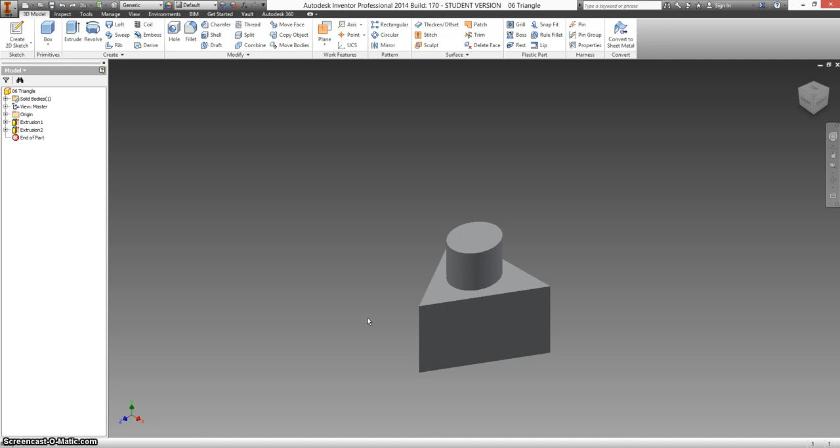Now that you know how to loft, we're going to go back to our triangle base, and we're going to make the female passenger for the Automoblocks car. This is a good example of lofting because with the waistline and the different curves that she has, it's going to require more than just simple extrusions.

First thing is we're going to take this chunk that was an extrusion and delete it. But we're going to keep the sketches that we first used to make it. So uncheck consume sketches. We're going to make a new plane, and according to my drawing I'm going to drag it up 0.19 above the surface. Make a new sketch on that plane.

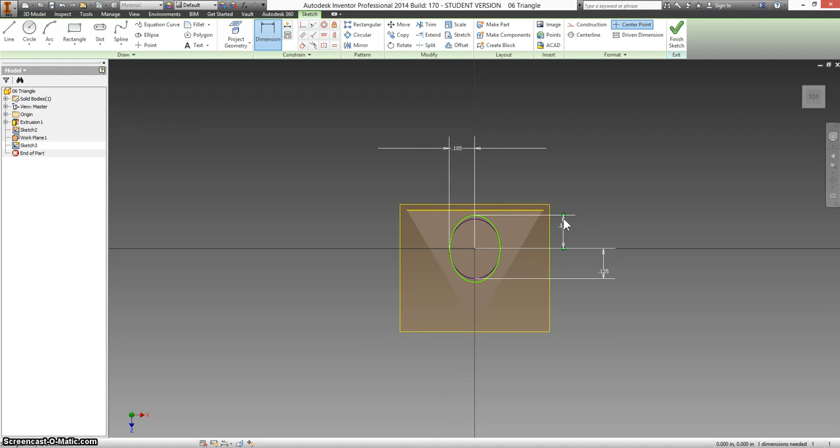We're going to make a new ellipse using this as our center point. And the major axis of the ellipse is 0.28, but I want half of that. The minor axis of this ellipse is 0.22, and again I want half of that.

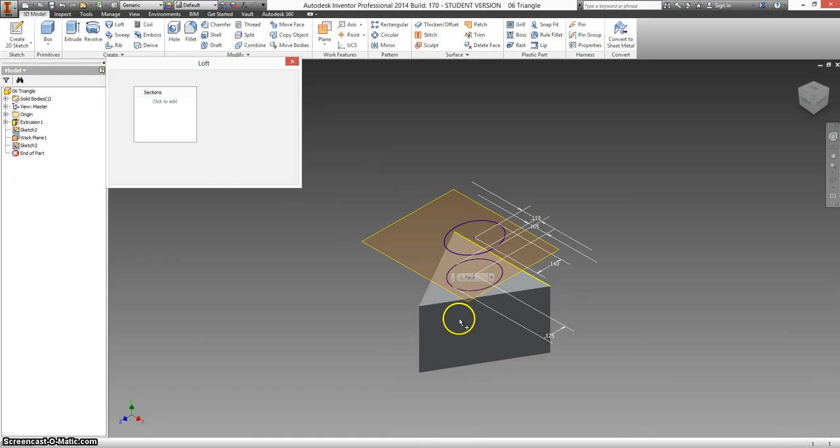So already you can see it's not a perfect offset. It's kind of like doing the extrude taper, and we could choose to loft this now or at the end. I'm going to go ahead and do this now though. We're going to make a new sketch on top of here.

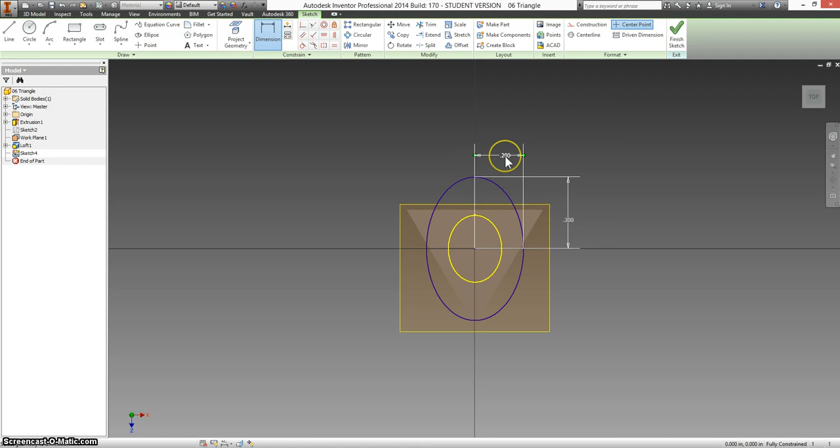For the bottom of her dress she has another ellipse, and this ellipse has a major axis. Again, we want the radius, not the axis, but it has a major axis of 0.6. So 0.6 divided by 2 is going to be 0.3. Minor axis is 0.4 divided by 2, which is 0.2. We're going to finish this sketch.

Then we're going to click on plane, and between the bottom of her dress and her waist is a distance of 0.36. Make a new sketch, choose ellipse. Now her waist is much smaller than her dress, so we can already start to make this a little tinier.

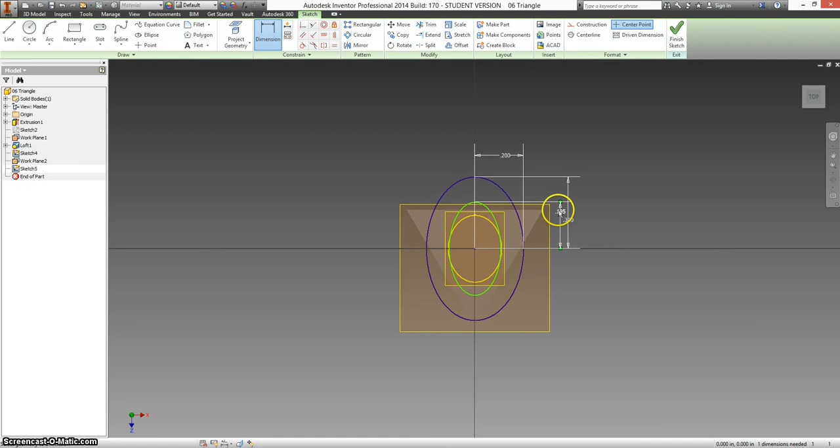The major axis, oh, I lost something. The major axis on her waist is 0.39. Divide that by 2 and you get 0.195. Minor axis of her waist is 0.31. Finish your sketch, and now we're going to go back and loft these two together.

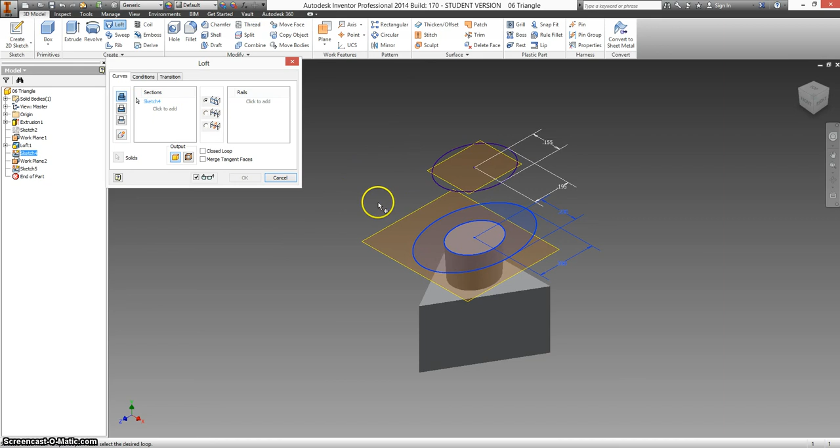Notice I can't select just the outside, and this may cause you trouble later if you get something too complicated. And because there's two different sketches in here, I have to click below to add a new sketch to this and select this top line.

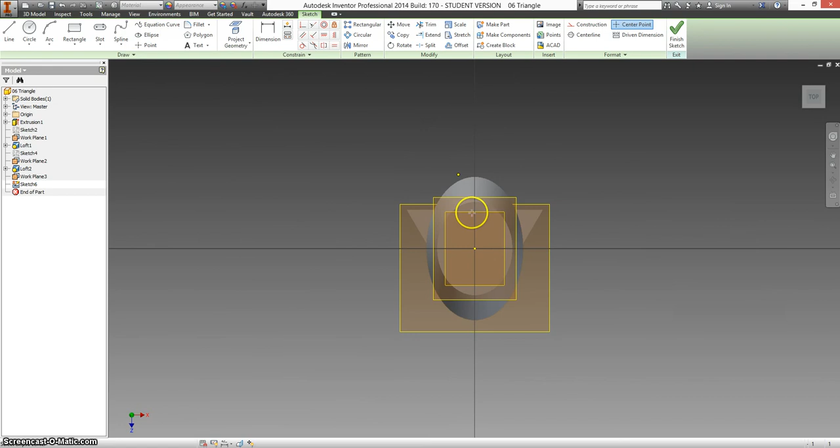Now that I have her waist, I'm going to extend up towards the head, so click on plane, click and drag upwards. It's a distance of 0.34. We're going to make a new ellipse on here. This has a major axis of 0.76, so divide that by 2. Has a minor axis of 0.54, divide that by 2.